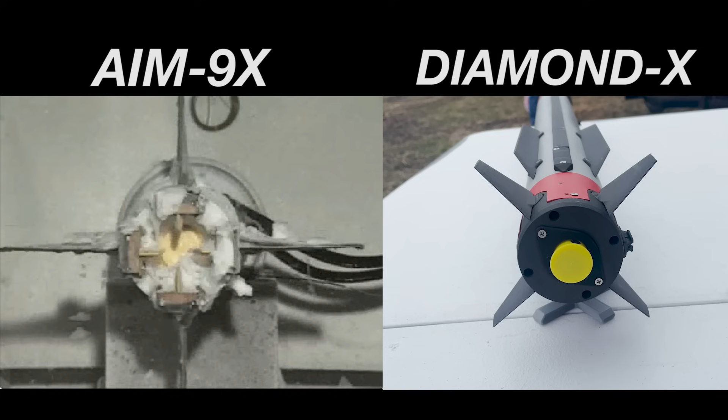I had 2 goals for the Diamond X program. First was to show full aerodynamic control of the model rocket and to improve over some of the previous rockets that I'd built. Both Diamond 1 and Diamond 2 used canards to try and steer, and this layout has a number of problems. Just like the AIM 9X, Diamond X changed to a tail control design to solve some of these controllability issues. My second goal was to demonstrate some unique types of guidance, steering the rocket to waypoints or along paths in the sky.

Doing these modes would be a huge technical challenge, but they would also let me put some of that academic control theory into practice in real life. The end goal for both the waypoint and path-following guidance modes is to try to fly the rocket both upwind and downrange to help the rocket recover to a safe landing site under its parachute.

So what has this rocket done so far? Flight 1 tested the rocket's Euler angle control system. I commanded the rocket to fly straight up and included a 45-degree roll program. This worked almost flawlessly, and a video for this flight is out on the channel.

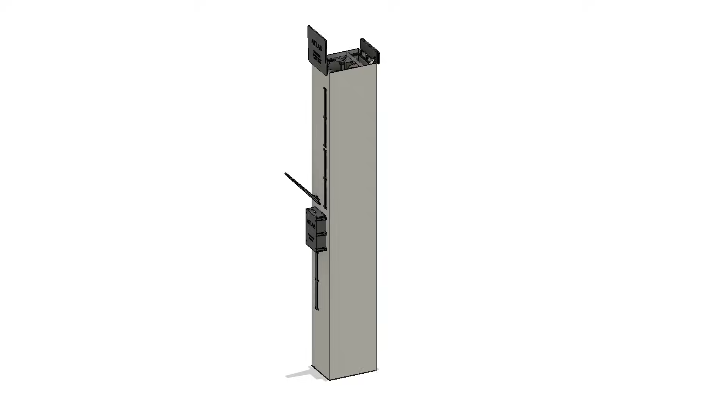Flight 2 was all about testing Diamond X from the Atlas hot launch silo. The rocket was loaded and held by the metal rails in the silo, and its rocket motor was ignited. This is some of the coolest launch footage I have ever taken. In flight, the rocket executed a pitch program, pitching down to 20 degrees below vertical and back upwards. This worked pretty good, but it could have been more maneuverable, especially at high speed. This launch also damaged the silo, so that entire thing's going to have to get rebuilt. And that leads us to today and flights 3, 4, and 5.

Okay, so before we talk about these last 3 flights, we need to talk about some background on what these rockets do and how they work. On board Diamond X, there are 3 important systems. They are the guidance system, the navigation system, and the control system. As I've discussed before, the navigation system tells you where you are, the guidance system tells you where you want to go, and the control system actually gets you there.

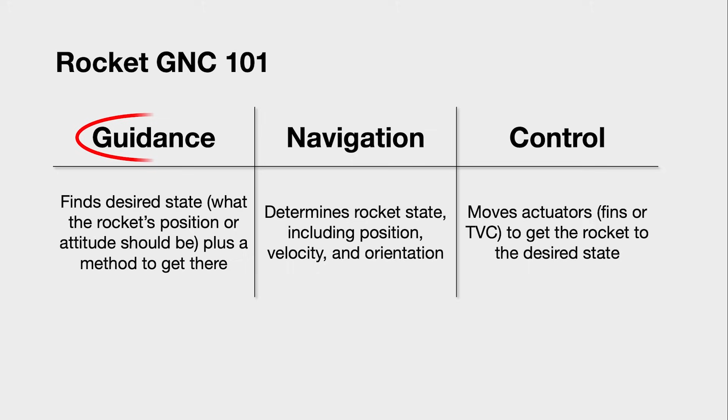Now, I refer to these as guided rockets, where others will describe them as a rocket with an active control system. To be very clear, these are kind of the same thing. If your rocket has an active control system of any type, it has to have some guidance system, even if it's very simple, telling the rocket where to go.

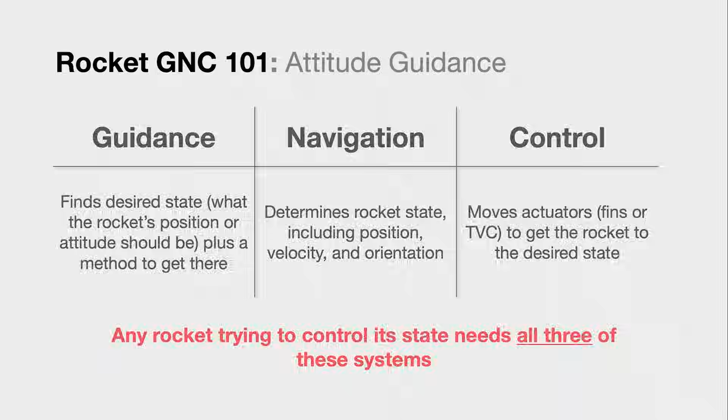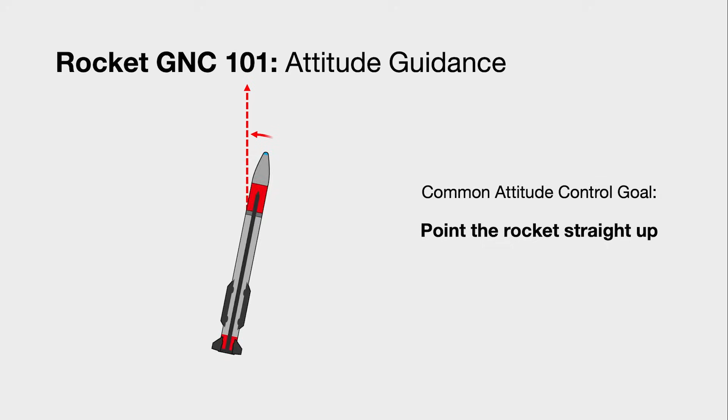Most amateur rocket guidance systems are trying to control the rocket's attitude, or where it's pointing. The most common one of these, and probably the safest, is point the rocket straight up. This keeps the pointy end up, the flaming end down, and gives you the best chance of safely recovering your rocket.

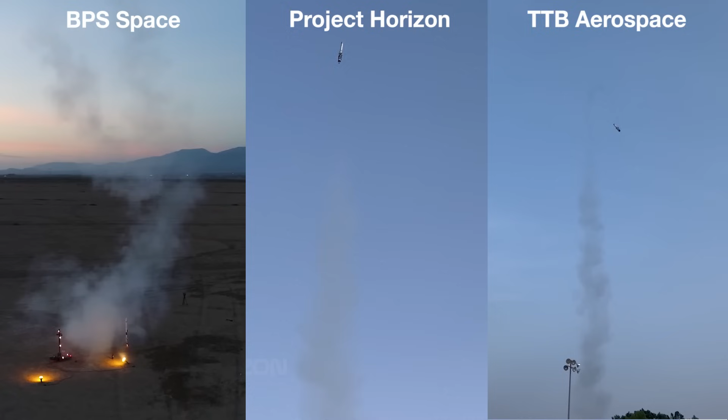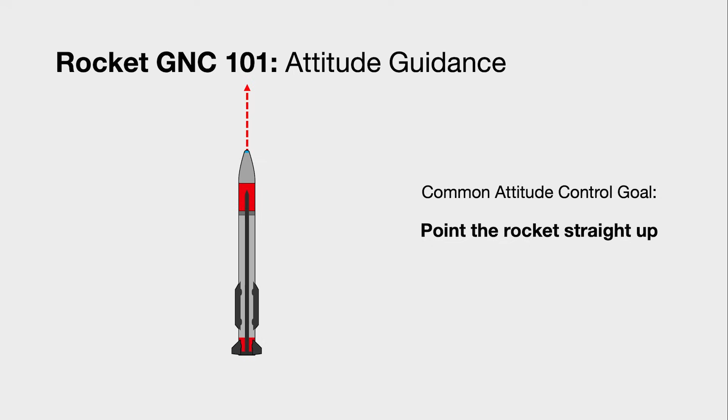There are also some very talented people out there who have landed model rockets propulsively, and this is a very, very difficult guidance and control problem. Questions like, when do you ignite the landing motor, and how fast should you be going at a given altitude, are things that the guidance system has to figure out. A lot of the work that I do on this channel is implementing interesting or novel guidance systems. Diamond X flights 3, 4, and 5 tested one of these new systems.

Now, confusingly, Diamond X actually has 3 different guidance systems that are active at different times during its flight. So to help all of the flight footage make sense, we're going to go over what those 3 different systems are, how they work, and what triggers the guidance mode to change in flight.

Guidance modes 1 and 3 are both variations on Euler angle guidance. This is a type of attitude guidance system that takes pitch, yaw, and roll set points and tries to have the rocket achieve them. The first mode to talk about is launch direction hold.

On launch, the rocket isn't going fast enough to do any fancy guidance modes, and we also need to calibrate some parts of our control system. When we're trying to fly to waypoints, this is the mode that's active as the rocket leaves the rail. It tries to point the rocket straight up and get its roll under control.

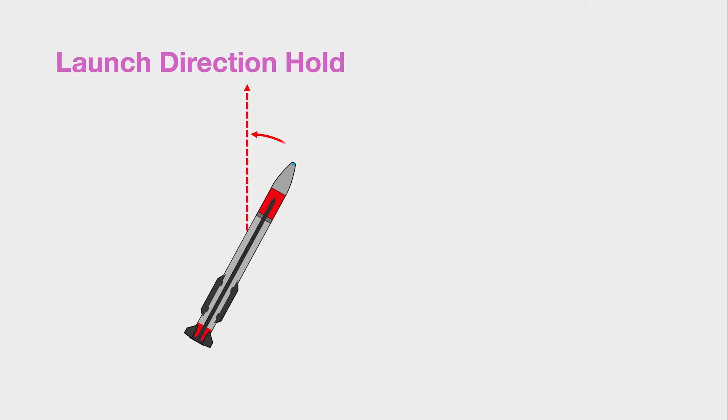To change guidance modes, the rocket checks its roll angle and its roll rate. If those 2 values are within certain thresholds, it means we've got the rocket stable and we can transition to waypoint guidance.

Before launch, the rocket is assigned a waypoint. These are coordinates relative to the launch site and include a position and an altitude. I can choose a waypoint that is both upwind and downrange, both to shorten our recovery distance and to keep the vehicle away from all the people at the launch site.

This waypoint track is assigned remotely via the data link. Without a track assigned, the rocket will fly a pre-programmed pitch, yaw, and roll profile that's stored on the onboard SD card. If I have assigned a waypoint, the rocket will try to fly to that waypoint instead.

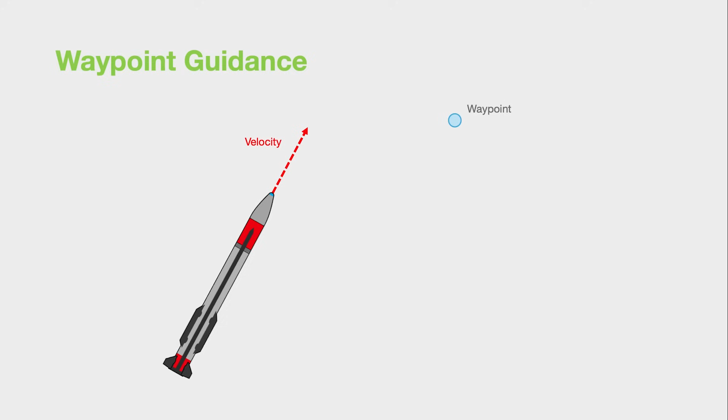Diamond X tracks its position with its onboard inertial navigation system, and it tries to fly as close as possible to this waypoint. The rocket compares its position and its velocity to the position of the waypoint and generates lateral acceleration commands. Several other pieces of guidance and control software translate this into fin deflection angles.

When the fins deflect in pitch or yaw, it rotates the rocket to some angle of attack. This makes the rocket's body generate lift, and this lift is the force that causes our lateral acceleration.

When the rocket detects that it's past the waypoint, it changes guidance modes for the last time to Guidance Abort Euler. This is almost identical to the Launch Direction Hold mode, trying to point the rocket straight up and control its roll. Unlike Launch Direction Hold though, this mode is permanent and the rocket doesn't look to change modes again for the rest of the flight.

After mode change, the rocket will also start reporting its closest approach or its miss distance over the data link, so even if we lose the rocket, we can tell if the guidance and control system worked. We point the rocket straight up at the end of the flight to make parachute deployment easier.

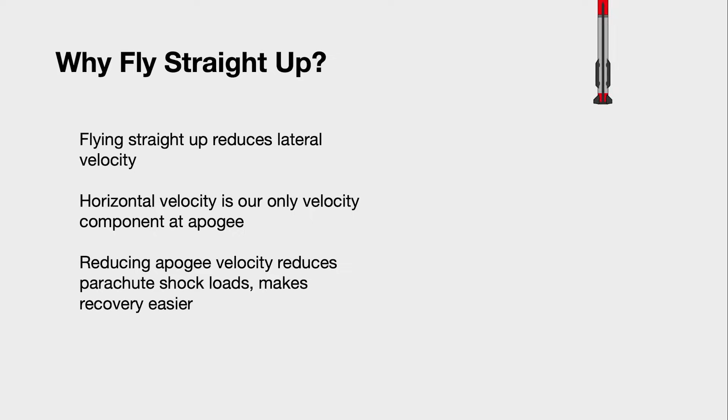We want to deploy our parachutes while the rocket's going as slow as possible to minimize the shock loads of the parachutes deploying into the airstream. As we approach our apogee, our vertical velocity goes to 0, but our horizontal velocity stays constant. If we're going too fast when the parachutes deploy, the shock cord or parachute attachment might snap. The Abort Euler guidance mode tries to minimize that risk by keeping our rocket traveling straight up at the end of the flight.

Now, there's actually a second reason the rocket might go from waypoint guidance to abort guidance. If there's any mistakes in the waypoint guidance algorithm, the rocket could spiral out of control and come careening back down towards the ground. Obviously, this is very unsafe, so waypoint guidance has a built-in failsafe.

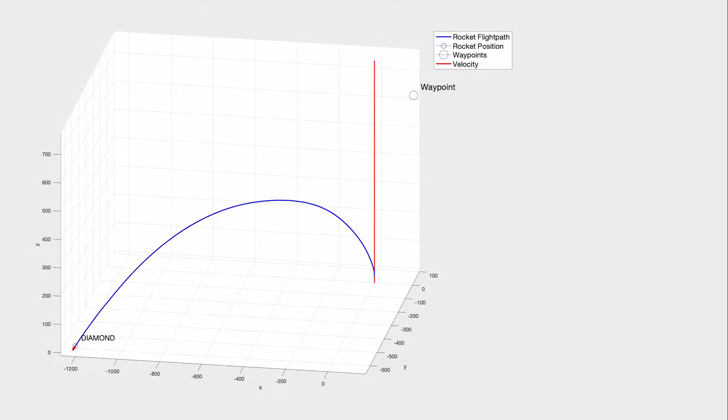If the rocket's pitch or yaw angle ever exceeds 40 degrees, the safety system will automatically switch the rocket to abort guidance and will stop trying to fly to our waypoint. Now, I'm never going to set the rocket's waypoint at such a low angle on the horizon, so the only time this system should trip is if there's some fault in the guidance system. Right? This is foreshadowing for later.

The last thing I'll mention is that you'll see the control system turn on about 20 meters in the air. This gets the rocket up and off the rail before any of its fins start to move. When we watch the flight footage, you'll also be able to see what guidance mode the rocket is in. When those modes change, you should be able to see the rocket's behavior change.

Okay, that's enough diagrams. Let's talk about these last 3 rocket flights. Flight 3 was my first attempt at doing waypoint guidance. A waypoint track was assigned upwind and the control system was checked. We got ready to launch. 5, 4, 3, 2, 1.

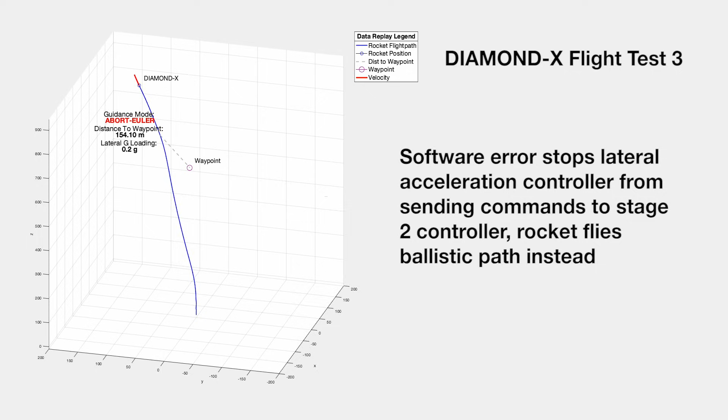So it turns out I had forgotten a single line of code, and this had paralyzed the entire guidance system and left the rocket commanding 0 lateral acceleration. I'd done some last-minute tweaking to the guidance algorithm and didn't ground test that, so that's on me, I guess. Well, okay, so the waypoint guidance didn't work, but all of the mode transitions worked really well. So we did a little bit more ground testing, fixed that problem, and then it was time to try again.

Flight Test 4 was a very similar setup. A waypoint 40 meters downrange and 650 meters in the air was assigned via data link. Given that at this point the whole waypoint guidance and acceleration control systems were totally untested, success here is getting within like 10 meters of the waypoint. I would be ecstatic if we got that close. 5, 4, 3, 2, 1.

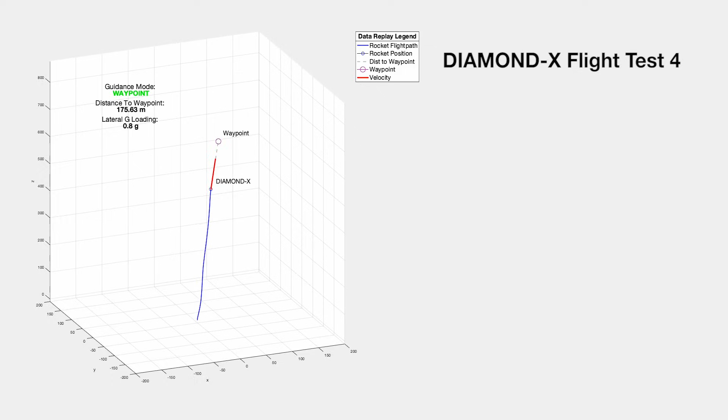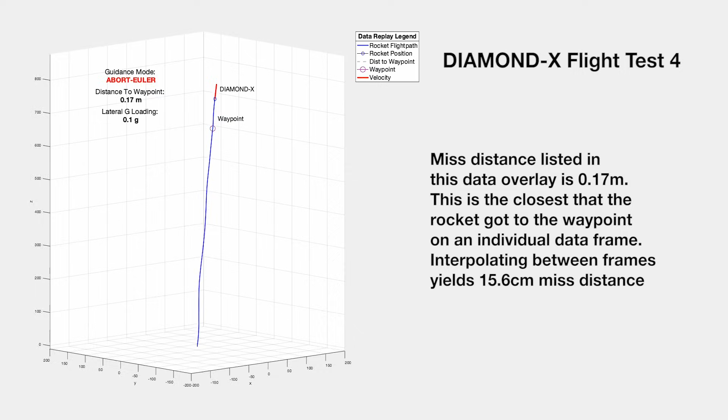After liftoff, we can see the control system enabling and launch direction hold getting the vehicle under control. At 127 meters in the air, it transitions to waypoint guidance and it pitches downrange. The distance to the waypoint comes down with acceleration control working really well. 6 seconds into flight at 70 meters per second, Diamond X passes the waypoint 15.6 centimeters off the rocket's right side. After passing the waypoint, the guidance mode changes to abort Euler and Diamond X pulls up to vertical. At 828 meters in altitude, 12.5 seconds into flight, the rocket reaches apogee and deploys its parachutes.

Okay, so this flight had a miss distance of 15.6 centimeters. That is an order of magnitude more precise than I was expecting it to be. But does that mean that Diamond X has a 15.6 centimeter precision? How do we even measure the precision of a vehicle with a guidance and control system? So this topic is actually very complicated, but the short answer is no. We can't say that Diamond X has a 15.6 centimeter precision, and we can't authoritatively say any other number either. Precision is a probabilistic process, and our understanding of that process is limited by statistics.

As a probabilistic process, a rocket's ability to fly along a path or to a certain point is a variable with some distribution. The rocket may go here or here, but it's most likely to go where the probability is the highest. The width of this distribution is related to our precision. If this is a normal distribution, we can describe its width with sigma values or with standard deviation. The lower these values, the more precise the rocket is, but on any given flight, it may have any miss distance. Another way you may see precision described is with CEP, or circular error probable.

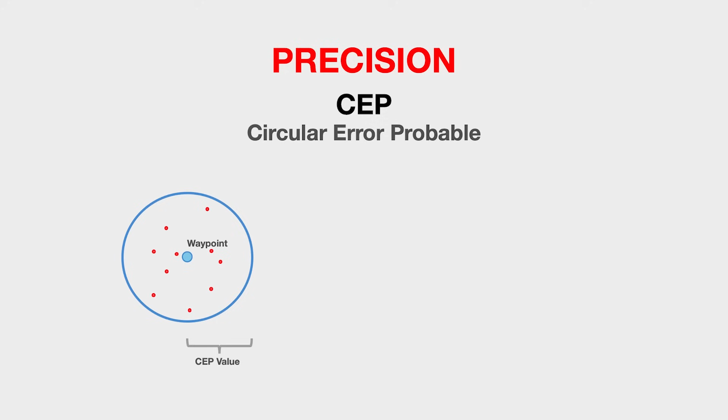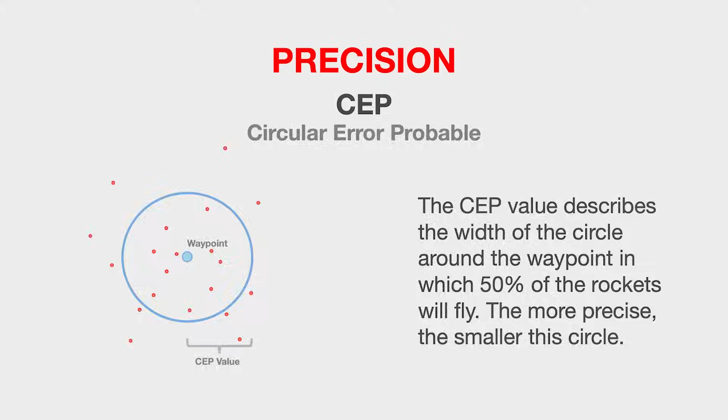In this case, this value describes the radius of a circle around our waypoint. If we launched Diamond X 100 times, it would pass the waypoint inside of the circle 50 of those times, and it would pass the waypoint outside of the circle the other 50. Again, the smaller the circle, the more precise the rocket is. No matter whether you're measuring with circular error probable, or standard deviation, or any other probabilistic metric, you need to know what the value of that metric is.

To find these values, we have to collect data. We need to launch the rocket a whole bunch of times, collect some miss distances, and then do some math on that data set. This math will also tell us how confident we are with our estimate of this metric. Because I have exactly one data point, there is no math that I can do that will tell me really how precise this rocket's control system is. I'll just have to keep flying it, keep tasking it with waypoints and generating miss distances, and then I'll circle back to this whole precision thing when I have more data. So this flight was very precise. We'll just keep launching it and see what happens.

Didn't we have a third rocket launch to talk about? Okay, so Flight Test 5, a little bit of a good news, bad news situation. I did this launch after Flight Test 4, hence the name, and I knew that Flight Test 4 had gone really well. So I tasked the rocket with a waypoint 80 meters upwind, 650 meters in the air. This would give the rocket a little bit more of a challenge, make it maneuver a little bit more, and would really test its guidance and control system.

This is also the second Diamond X airframe. This is the one we've been building in that build series, and so this rocket has extra raceway wires to fly with a first stage booster. This was just a shakedown flight testing its hardware and its software on a single stage flight. Sky is clear. Launching in 5, 4, 3, 2, 1.

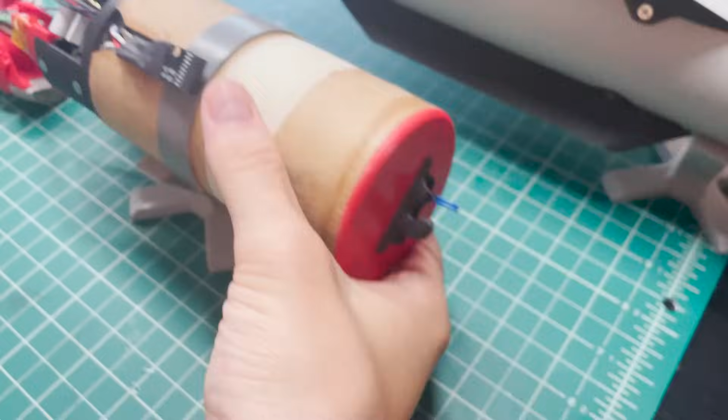This flight suffered two unrelated failures. The first was this carbon fiber 3D print. This is the wishbone piece that connects our parachute and shock cord to the avionics assembly. This part broke when the parachute deployed, and so the entire avionics assembly fell from over 2,000 feet. This is made out of a very strong carbon fiber polycarbonate, but unfortunately it wasn't printed at 100% infill like it was supposed to, and you can see that it cracked right in the middle of one of the voids in the infill. So that was on me.

I should have printed this 100% infill, and I didn't, so this part was weaker than it should have been. This is also a part that a nylon might be really good at because it's more shock resistant, and this is primarily a shock load that it sees when the parachute deploys or when the shock cord snaps taut. Luckily though, it didn't really take much damage. The flight computer was actually still on and transmitting telemetry when I found it, and the battery was just kind of dangling out the front of it.

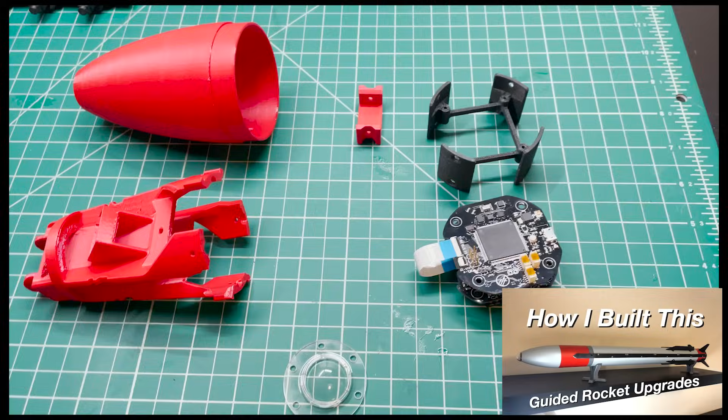Remember when I said this in the airframe assembly video? The weak links that I designed into these parts are like the arms right here. These are very kind of weak, so if the rocket hits down sideways, the battery will kind of crack off inside of the nose cone, and that should take some energy away from the impact. Well, it looks like that's exactly what happened.

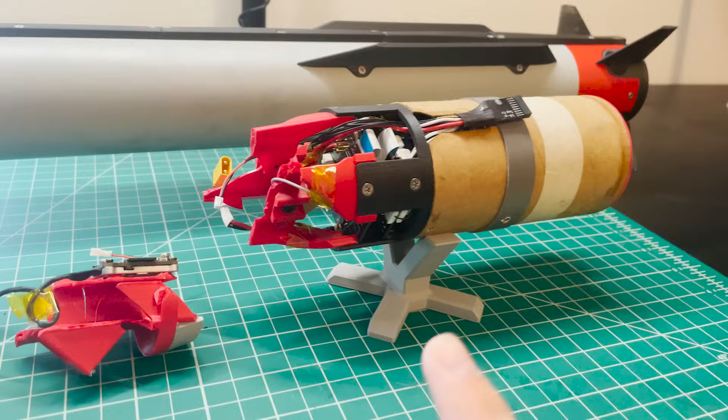The battery mount broke right on these arms right where it was supposed to. The battery cracked off, and it was still connected to the flight computer. Everything else is pretty much damage-free. So all I have to do to fly this guy again is reprint the battery mount, reprint the nose cone, and reprint our wishbone that attaches us to the shock cord, and this rocket should be ready to fly again.

The second failure was its guidance system. This wasn't really much of a failure because the rocket did exactly what it was supposed to do, but the guidance system ended up aborting before the rocket reached the waypoint. Okay, remember that foreshadowing thing and how I said something would come up later? It's now later. On this flight, the rocket had a really tough time controlling its roll.

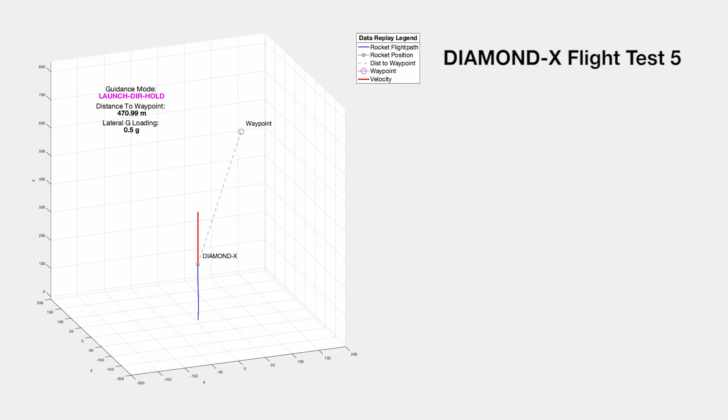Flight 4's waypoint guidance enabled at 135 meters in altitude, but Flight 5's enabled at 400 meters. This meant that the vehicle was already much higher and it needed a much more aggressive maneuver to try to get to its waypoint. As soon as waypoint guidance enables, the rocket pulls almost 7 Gs before tripping that pitch angle limit that I talked about earlier and reverting to abort Euler guidance.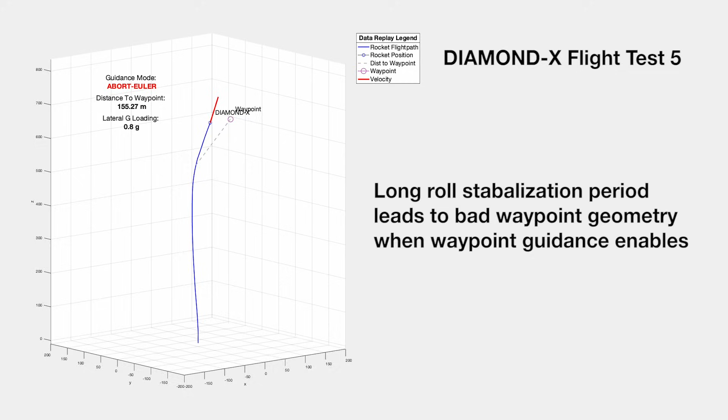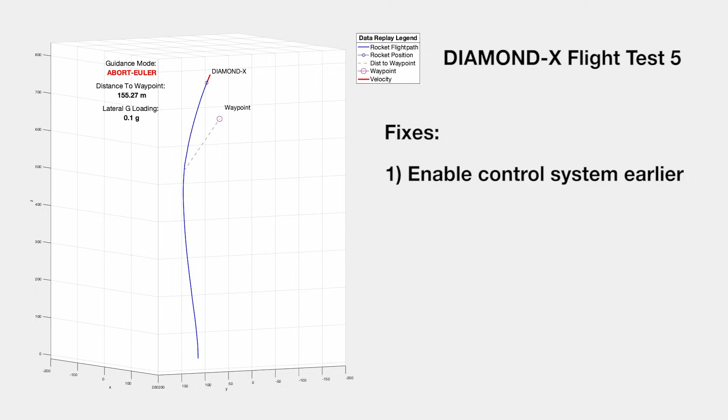So I can do 3 things that will help fix this. First, I can enable the control system at an even lower altitude. This will prevent that big initial roll from occurring, and we should stabilize our roll quicker in the flight.

Second, I can relax the roll limits before waypoint guidance enables, and this will again help the rocket start guiding earlier. Lastly, I can do a better job of aligning the raceway and fins before launch, and that'll reduce these adverse roll moments that we get.

So Flight 5 didn't guide successfully, but this was a good test of that pitch angle limit, and that worked wonderfully. So that's a huge safety system to have on board, and I feel a lot more confident going into the next flights that I know that that safety system works.

Speaking of safety, I wanted to take some time here at the end of the video to talk about how you can do rocketry with or without a control system safely and without getting into any trouble. Rocketry is actually a pretty safe hobby, especially compared to something like motorcycle riding. But this doesn't mean that there aren't any risks. In fact, there are a lot of risks. Rocketry is safe because we study and we mitigate those risks. We have strict safety rules and we follow them.

A lot of these rules don't actually come from the government. They come from club organizations like NAR and Tripoli in the United States. If you're outside the United States, your local rocketry organization certainly has their own safety code as well. It's really important for you and everyone else that everyone is following these rules, understands the risks, and is taking good steps to mitigate them.

If you're flying a rocket with a guidance and control system, you need to take some extra safety precautions. Here in the United States, NAR has some recommendations including increased standoff distances, but a lot of the safety is actually going to come down to you as the engineer. You need to design a system that is redundant where it needs to be, that fails safely, and that's been tested on the ground. Your guidance or control system failing during a bench test is really frustrating. These systems failing while your rocket is flying through the air can get people hurt.

A big piece of reducing risk is modeling and simulation, which I have a whole video dedicated to coming out next.

Lastly, I wanted to mention not breaking any laws. I have triple and quadruple checked, and I am not aware of any laws in the United States that would stop you from building an active control system for your rocket and flying it. That being said, I cannot speak for any other countries. If you are outside the United States, please check your country's laws to make sure you aren't breaking any of them if your rockets start to steer themselves around.

Even if you are allowed to build rockets with guidance and control systems, obviously, you need to be very responsible with them. Doing something reckless or unsafe with a rocket, intentionally or otherwise, is a pretty good way to get yourself into trouble. Like prison trouble. And if you're ever not sure where the line is, that's probably a good time to not get any closer to it.

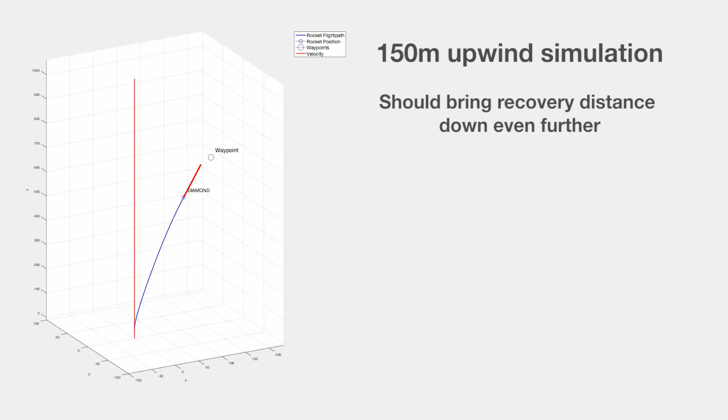Okay, we can now task rockets to waypoints. What is coming up next? We're going to keep flying Diamond X. I really want to try some further upwind waypoints to try to keep those recovery distances short. I've also been working through booster integration, and we should have our first Diamond X Block 3 flight with a booster in the next few months.

You guys may have seen me posting some stuff about Hatchet. This is the rocket/drone thing I'm building with a ducted fan. Hatchet's being put together right now, and I've got its propulsion and control assembly prototype built.